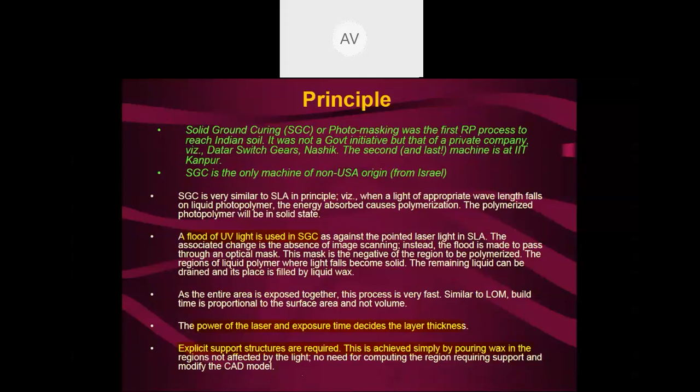Then what we will do after this, we will wipe out the excess liquid polymer, and then we will fill the wax as a support. If some areas have holes or something, in those places we will fill the remaining area with wax, and then again we will cool down the wax so that it gets solid, and then we will mill it for surface finish. For exact thickness we will do the milling, and then again we will apply the liquid polymer.

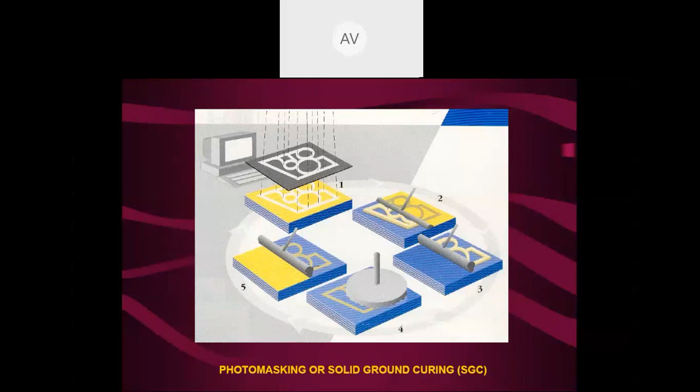So this one is a machine. Here also the same thing, everything. So here your platform is there. We will pass the UV light and you can see the image. This much part will be solidified, and then we will remove this photo mask. Then we will apply the wax spreader, and it will fill the holes and give support to your main part. Then we will cool down the wax through this plate.

After cooling, we will mill it, and then again if you want another image to be passed, we will apply the liquid polymer again and pass the UV light. So slice by slice, the photo masking should be decided. The number of photo masks depends on the actual model and the layer thickness you are generating.

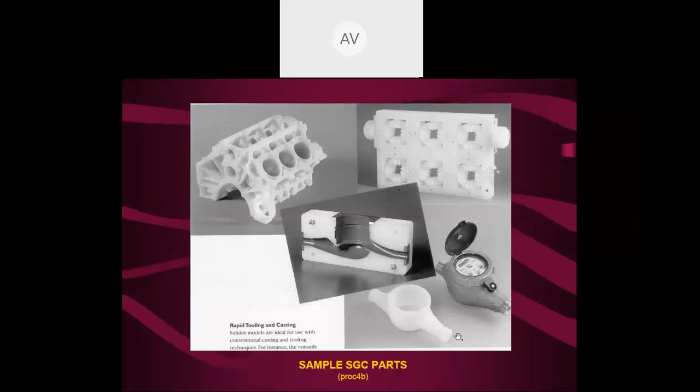We will discuss some advantages and disadvantages of SGC. The main advantage is the entire layer is addressed in one go. We use a flood of UV light, so at one time we can solidify the whole area we are focusing on. Hence it is very fast, and this high speed allows production of many parts and large parts. This process can be used for large scale parts also, meaning large size parts we can manufacture. So no post cure is required - fencing, cleaning and all those things are not required, so it is very easy.

No post cure is required as polymerization is complete in the machine itself. Then the milling step ensures flatness for the subsequent layer and Z accuracy. This approach is adopted in a few other systems for very high accuracy. After applying the wax, again we are doing the milling, so the flatness is maintained and accuracy is very high. That's why.

Supports are obtained by filling the wax, after sucking the liquid polymer, no extra support calculations are needed. Supports are obtained directly through wax, so no extra supports are calculated or needed. That one also is good - that is also an advantage of this.

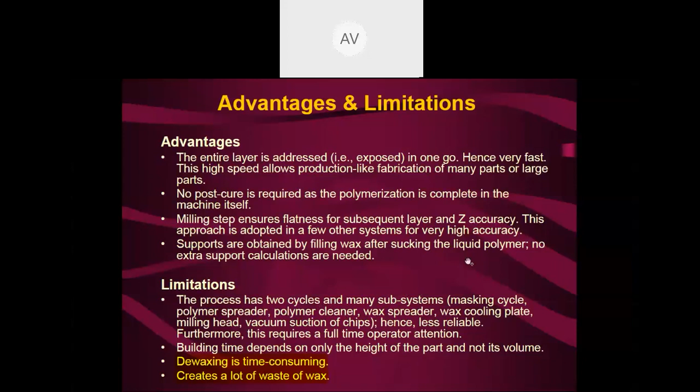So the next process is Objet. First we will see the principle of it. It's very similar to SLA and SGC in principle. That is, when light of appropriate wavelength falls on a liquid photopolymer, the energy absorbed causes polymerization, and the polymerized photopolymer will be in a solid state.

The principle of inkjet printing is used, with ink being replaced by the liquid photopolymer, or raster-based printing technology. Here multi-jets are used to improve productivity. Presently 8 pairs of jets are used, as MEMS technology improves and more heads can be packed. A flood of UV light is thrown on the table when printing takes place.

Explicit supports are required, and water-soluble gel is used as a support material, which is not photosensitive. The support is simply blown off by a jet of water, so we can easily remove the support material using a jet of water.

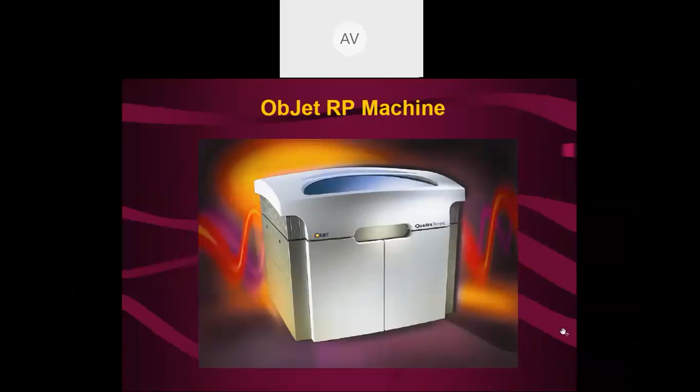This is one image of the Objet RP machine. Here you can see the technology. This is a multi-jet; it has 8 pairs. This total system is called the jetting head, and this head can move in the x and y direction, and through the jet we pass the UV light over here.

Then this is the model material, and this plate will move in the z direction, and here is the support material and the build tray. Support is like FDM with another material, and it is a jelly that is simply washed off.

Here you can see printing with 8 heads, synchronized jetting with sophisticated software tools, simultaneous jetting, identical amounts of resin, super thin layers of 16 microns, and immediate UV curing of each layer. So after putting the material, immediate curing occurs through the UV light.

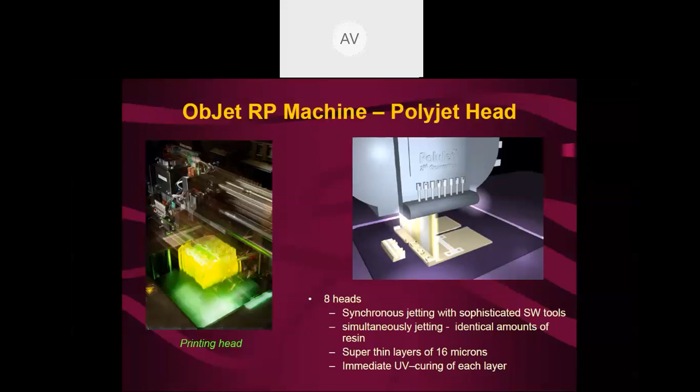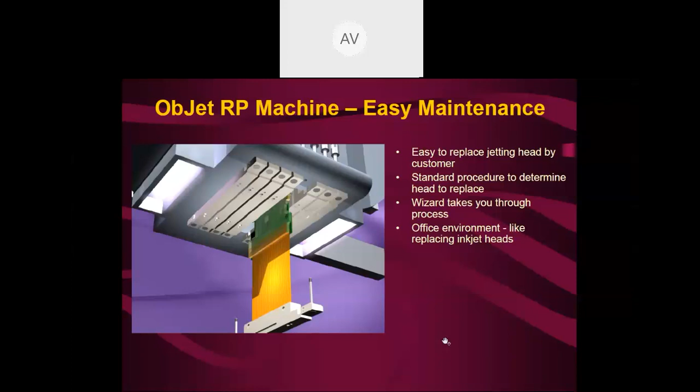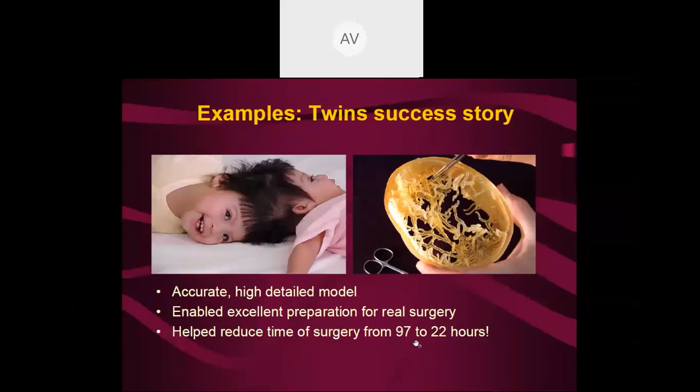Here, before surgery, in medical applications you can use this machine. You print the prototype of the skull and then study it. An accurate, highly detailed model enables excellent preparation for real surgery, and using this, the surgery time was reduced from 97 to 22 hours. So this is one example of this Objet machine.

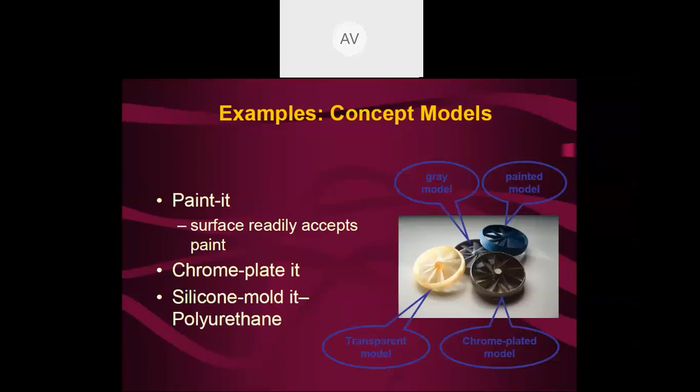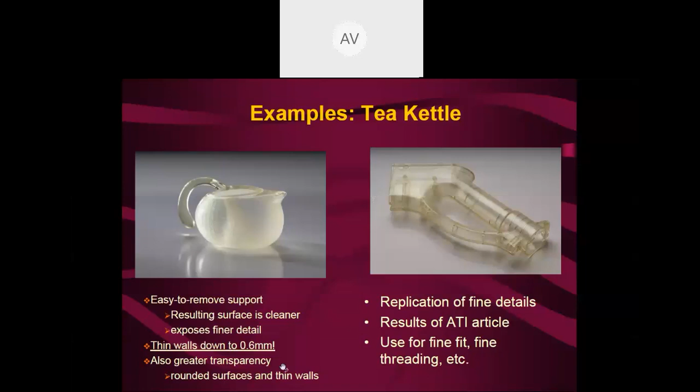Here the important thing is the advantages. First, quality models: accurate, detailed and smooth-surfaced models with any geometry design. We can have high accuracy, print detailed models, and the surface finish is also very smooth.

Second, it is fast, as it rasters in the x-axis with just indexing in y, and multi-jets reduce the number of indexings in y. So the x-axis moves and y is just indexing, which is why it reduces the number of indexings in the y direction. Then good material properties: good flexibility, impact strength, and transparency suitable for photoelasticity. This is also a good advantage.

Then easy operation: reliable, easy to use, easy to remove the support. Then a clean process, suitable for an office environment. Next, no post-curing is required. And easy maintenance: any pair of nozzles can be replaced individually.